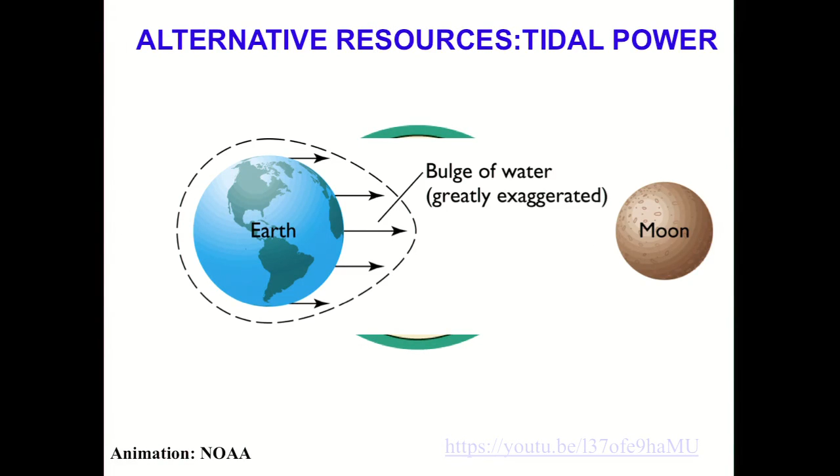So we get these so-called lunar tides, and then we also get these solar tides. I think there's a little movie here which may or may not work.

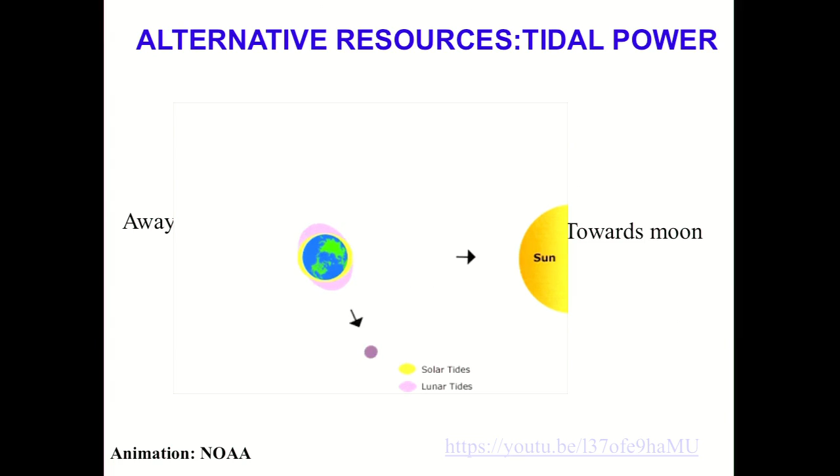You can see that we have the daily tides, which are then modulated as we go through full and new moon, which we call spring and neap tides. Those occur every two weeks, superimposed on the daily and semi-diurnal tide heights as well.

So the question is, can we actually make use of that change in gravitational energy? If you think about it, that gravitational energy change is pretty much inexhaustible as far as human beings are concerned.

When we say inexhaustible, that's not quite correct. Does anybody know what happens to the energy, this gravitational potential energy change, over time, as a result of the bulge imposed on the Earth?

Well, obviously energy is going to be lost through that process. 620 million years ago, the rotational period of the Earth was 21.9 hours. Today it's 24 hours. Energy has gradually been lost through an increase in the rotational period of the Earth because it's losing rotational energy. But we're not too worried about that on those sorts of timescales here.

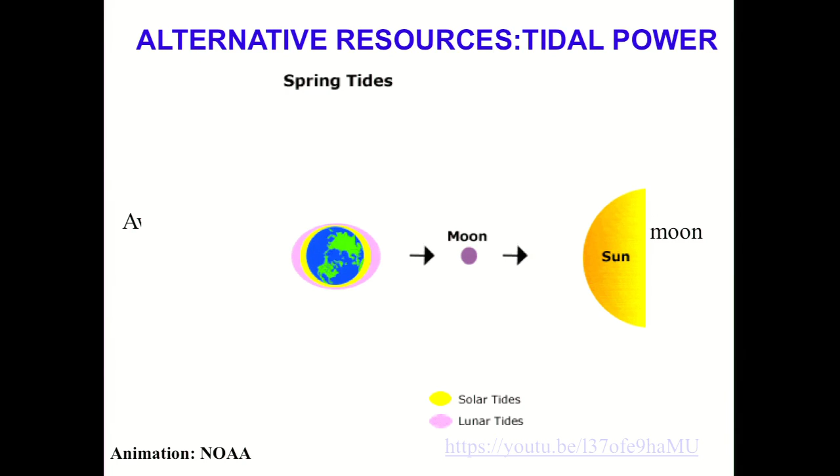As far as we're concerned, that potential energy source is inexhaustible. The question is, is it big, and can we make use of it?

So, how do we extract energy from tidal changes? Well, there are three approaches. There's one called tidal barrages, which are very similar to dams.

Effectively, as the tide height changes, water flows through a hole in some kind of dam that we might build, and that turns an electrical generator. And then, when the tide goes down, the water can flow back out in the other direction, and again we can get electricity generated.

Or we could stop that flow of water back out and hold it for when we actually need it, and release it and produce power when demand requires it.

There are also what are called tidal fences. Essentially those are vertical rotors which are placed off the coast. And then we have so-called tidal turbines, which are effectively very similar to wind turbines, except they're underwater.

Now, if you think about it, because of the density of water, it's about 800 times that of air. That should produce quite a lot of force on these turbines and produce a lot of energy. But remember, the currents are generally quite small.

In fact, it turns out that tidal barrages, because of the area they can take up, are actually the most efficient way of extracting power. We'll look at that in a minute.

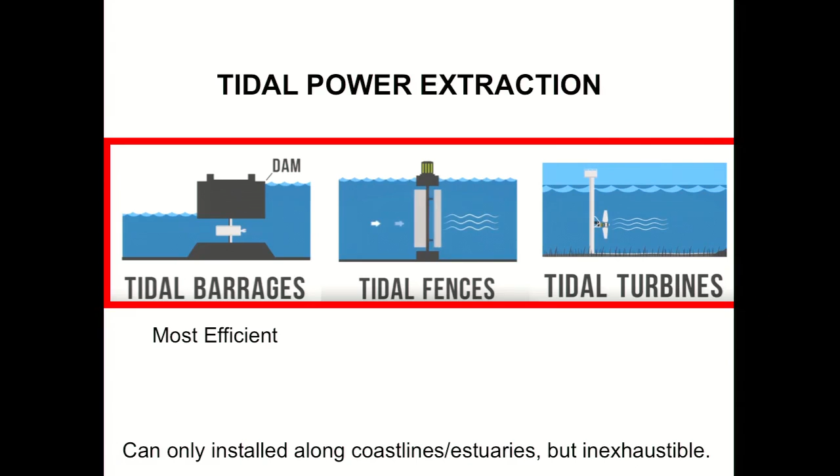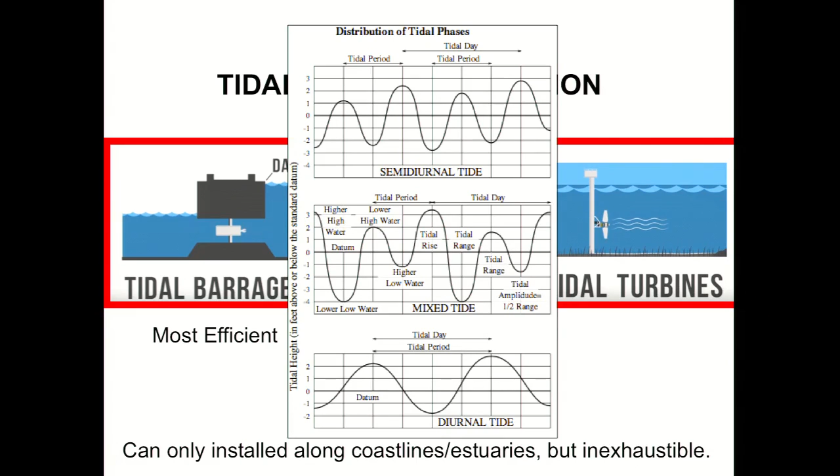So the advantage is, of course, we know an awful lot about tides, their periods, etc., and their location. So we should be able to produce a very good bottom-up estimate of the amount of power that we can extract from these tides. So it's a predictable energy source.

So, a tidal barrage. Well, what is a barrage? Basically it's a dam, but essentially it's built right across an estuary, so it's just much bigger. And what you can see there is that at low water tide and high water tide we have essentially a change in potential energy as a result of the height of the water.

And we're going to make use of that as the pool behind the dam or the barrage is filled. That's what we call the tide pool. So at low tide the water might be let out through the electricity generator to turn the water's potential energy into electricity. And the potential energy is simply G times H.

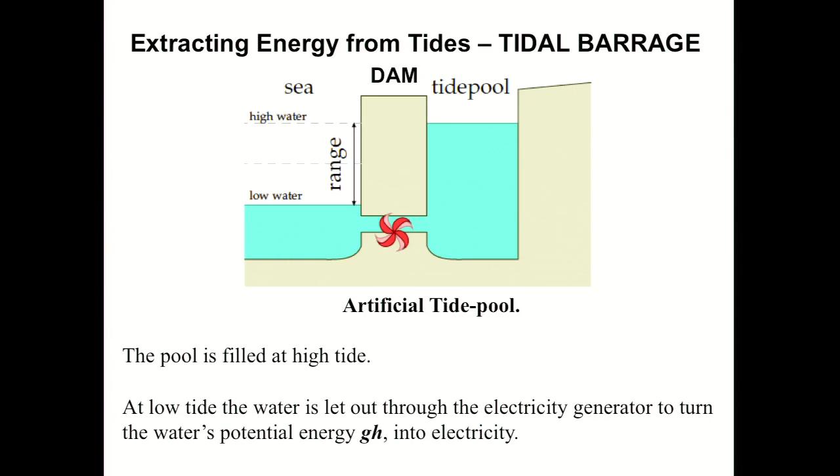Now be careful, H is not the difference in the tide change, which we call the tide range. We'll come to that in a moment.

So, let's look at a typical European tide range. On average it might be about 4 meters. That's the difference between low and high tide.

And it's been estimated through various studies that the maximum power of one of these artificial tide pools or barrages, which is filled rapidly at high tide and then emptied as we want it to be at low tide through these various generators, so we can generate power in both directions if we want. But it turns out it's actually about 3 watts per meter squared.

That number should sound a little bit familiar. It's roughly the same as our offshore wind power density for a wind farm.

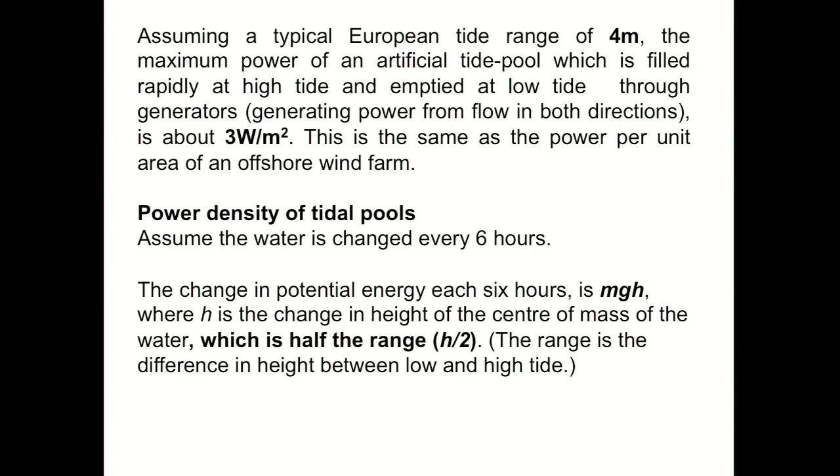Let's think about the power density of these tidal pools. Remember, in a semi-diurnal tide, water is changed every 6 hours, say. So the change in potential energy we're looking at, every 6 hours, is simply the mass of the water times G times H. But H is the change in the height of the centre of mass of the water, which is half the range of the tide, so H/2 in that previous diagram. Remember, the range is the difference in height between low and high tide, so be careful about H versus H divided by 2. Read any question about these barrages very carefully.

The mass per unit area covered by a tide pool is simply the density of the water times 2H. Remember, the density of water is roughly 1,000 kilograms per cubic meter.

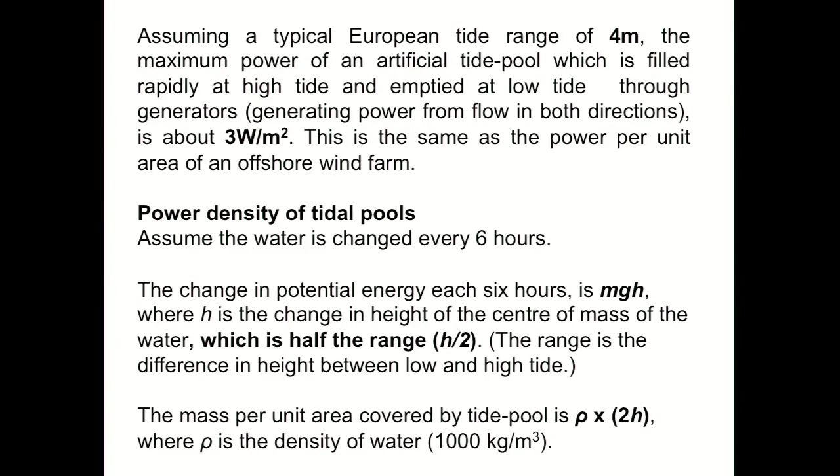So the power per unit area generated by a two-way tide pool is 2 rho H G H divided by the time over which we can access that energy, say 6 hours. Now if H is 2 meters in this specific example, then the power per unit area of our tide pool is about 3.6 watts per meter squared. That's assuming we can extract all that energy.

So the question is, what's the efficiency of our electrical generator from the previous diagram? Actually these generators are very efficient — 90% efficient is not unheard of. That gets us down to about 3 watts per meter squared, which is what we said before.

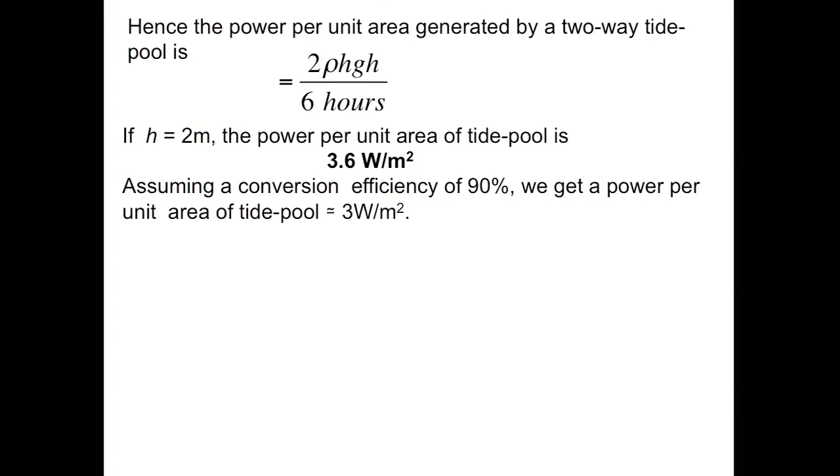Now, if we want to generate, say, 1 gigawatt of power on average over that diurnal cycle, we need a tide pool with an area of about 300 square kilometres. That's roughly a circular pool 20 kilometres in diameter.

And if you look around the UK, we can see various estuaries with typical areas of around 550 square kilometres — for example the Severn Estuary, or the Wash in northeast England off the coast of East Anglia, which is about 400 square kilometres. So those areas do exist.

Still working today. Is that a big number as far as global energy resources are concerned? If we go back to our energy budget for the Earth, we've seen that S infinity, the maximum we can get, is around 0.1 Q per year from tidal power. So it's not really a big player on the global scale, but it could be important for relatively small communities or towns, or locations suitable for installation of these tidal barrages.

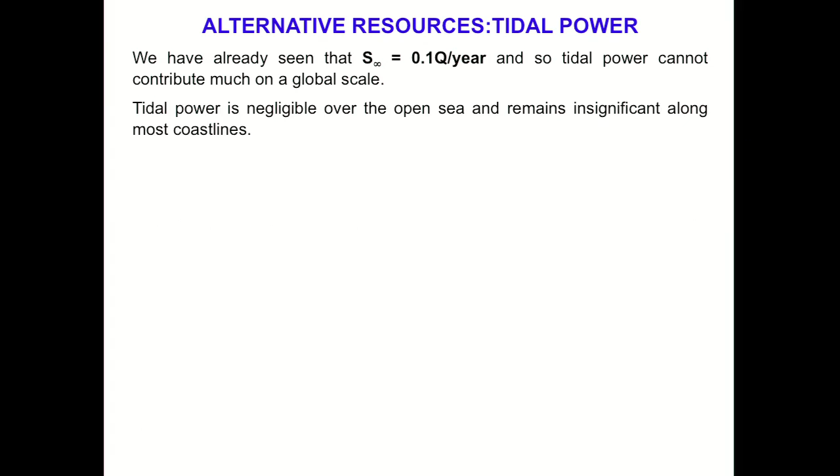Also remember that tidal power is negligible over the open sea, and actually pretty insignificant along most coastlines, but as we said, it can be quite important, particularly with a very suitable estuary where the tidal flow velocity can be substantial and even amplified depending on the shape of the estuary.

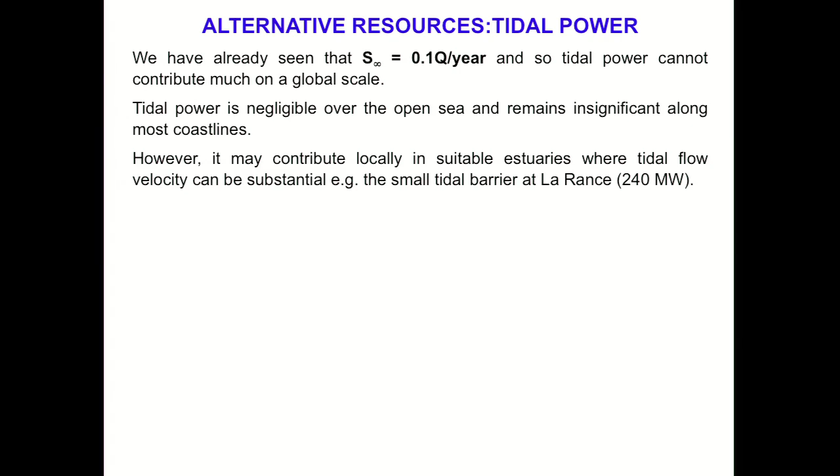For example, the La Rance tidal barrier can generate about 240 megawatts, which is actually relatively small, but it was one of the biggest for several decades, since the 1960s.

Now, if we do a survey, it turns out that the best cases for tidal power are the Bay of Fundy and the Bristol Channel / Severn Estuary. That's not just because it's a very big estuary, but because the shape of the coast funnels all those strong incoming tides into narrower and narrower regions, creating a resonance close to the tidal frequency. This can lead to very high tidal amplitudes, up to 40 metres in the Bay of Fundy, and a bit less in the Severn Bore, 10 to 11 metres, say.

So that makes it possible to utilise that rising and falling tidal water by forcing it through these electric turbines. If we look at the Bristol Channel region, a design study estimated that depending upon where you built the barrage, you could get power output of the order of 1,400 megawatts to 15,000 megawatts.

This is from the report which looked at the various locations you can build such barrages. We start out here at the so-called outer barrage, where we can get 15 gigawatts. We build a barrage here, we can get 8 gigawatts. If we go up here, we can get 1 gigawatt.

As the tides are essentially funneled into a narrow estuary, the flow increases, but the area decreases, although the height can also increase. So there are pros and cons to where you build things, but typically you would go for high velocity, high tide, with a large area behind the barrage, as you can see in the outer barrage there.

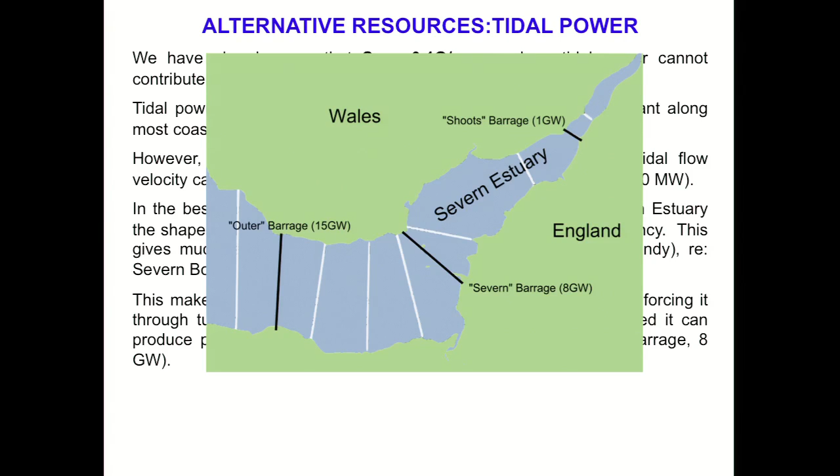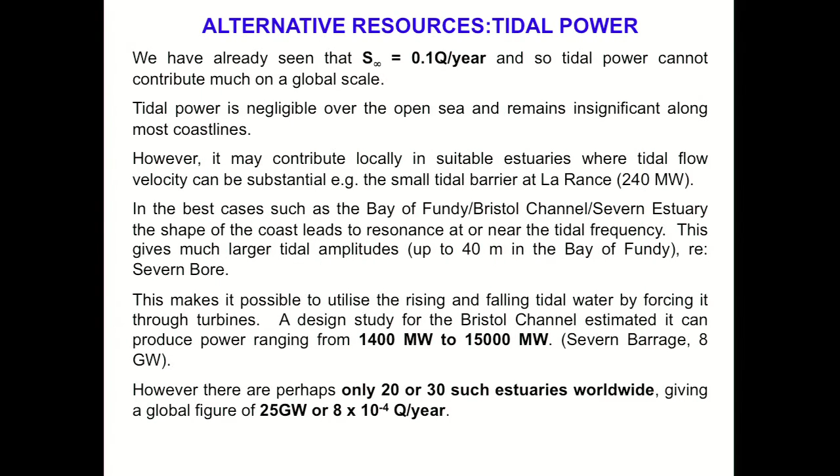However, there aren't very many places around the world like that. Surveys show that there are maybe 20 to 30 of these sorts of estuaries worldwide. So if you sum up all the potential power we can get from those estuaries, we're looking at a global figure of about 25 gigawatts. That's only 8 times 10 to the minus 4 Q per year.

Not only that, building these big barrages comes with a lot of environmental problems. Particularly in the UK, proposers of such schemes have failed to convince governments and the public that they've actually addressed those problems readily.

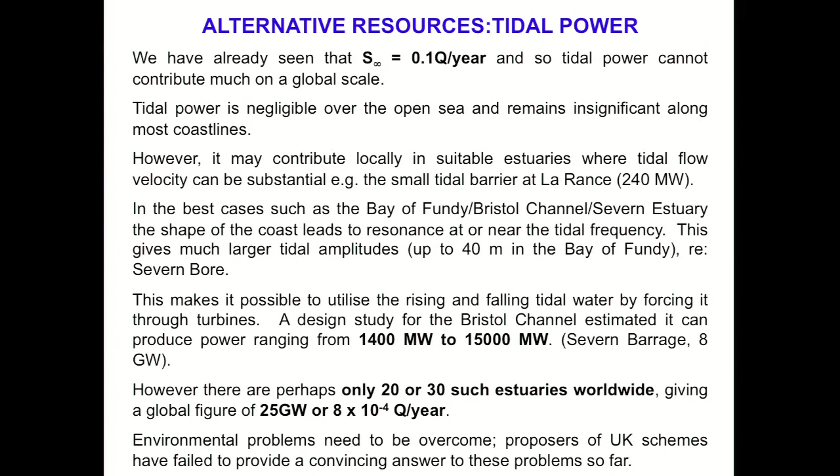So La Rance actually remained the biggest barrage in the world until 2011, when Sihwa Lake in South Korea was built. They have 30 square kilometres and were able to produce 254 megawatts. So that then became the biggest.

But if we focus just on the UK, the number of schemes that were proposed included 8 of those big large ones, but there are also about 34 very small ones, because the UK is basically an island. We've got lots of these little estuaries.

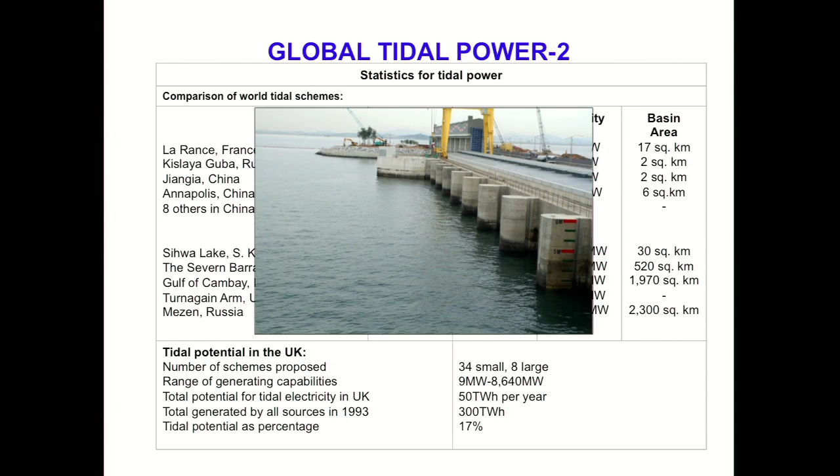Oh sorry, that's just a picture of the barrage in Sihwa Lake in South Korea. You can see essentially it's basically a barrier across the estuary, with lots of turbines built below.

Okay, what's next on the list? Well, we have geothermal energy.

Now, we estimated the total heat flowing out from the centre of the Earth to the surface was around about 1 Q per year. But if we were to average that over the entire surface of the Earth, that comes out to only 60 milliwatts per metre squared. So that's extremely small and not really viable as a global energy source.

But again, it might be useful for local communities. And there are actually two possible ways of extracting such energy. We can look for hotspots, in other words, the heat flow coming out of a very narrow region might be extremely large, and that's usually associated with volcanic areas. In fact, we've actually utilized such hotspots, or at least they have been utilized, for over 100 years in certain regions.

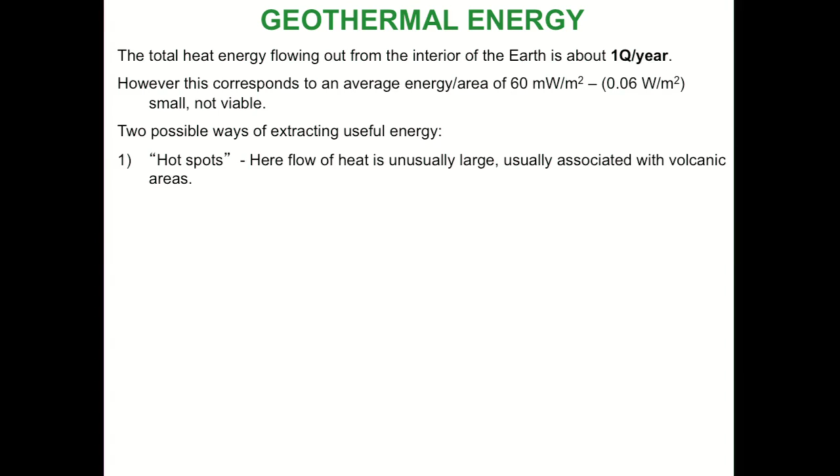So as we said, some of those have already been exploited. The world's first geothermal power station was actually at Larderello in Italy, built in 1904. And it now yields 400 megawatts of electrical power.

If we look globally, the total installed capacity is around about 4 gigawatts, mainly in California, Iceland and New Zealand. But that's about 10 to the minus 4 Q per year. Surveys suggest that maybe we could increase that by a factor of 10, to about 10 to the minus 3 Q per year.

Another approach is the so-called hot dry rock approach. You might have heard about this, or at least a related process. What you do is take water and pump it down a borehole drilled several kilometers into the rock strata, then suck that water back up another borehole parallel to it. The temperature change from going down several kilometers should heat the water up to about 200 to 300 degrees centigrade, and by the time it gets up it's superheated water and steam, which you can use to drive an electrical turbine.

Unfortunately, the experiments that were conducted did not produce very good results. Turned out the rock strata they were drilling in was very porous, so the water temperature fell much quicker and much more greatly than expected by the time it got back to the surface, and it didn't work terribly well. They put too much energy in to actually get any useful energy out. So there are no current experiments planned, and no projected resource estimate for that particular energy resource, unfortunately.

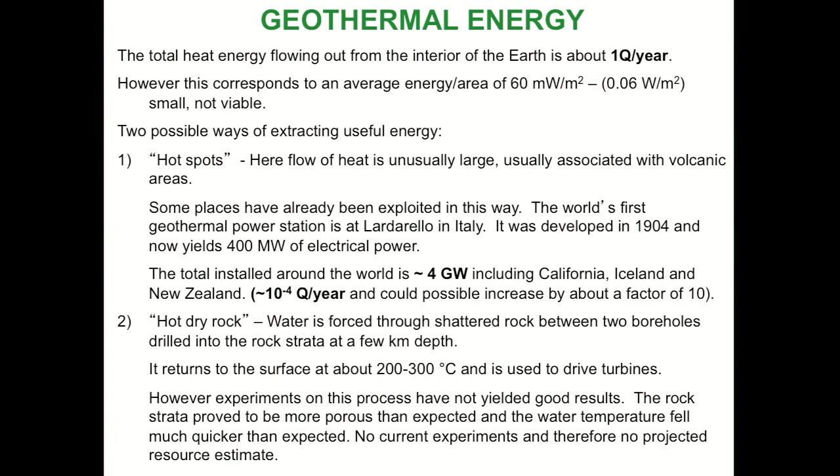However, there are some countries that do make use of it. Here, for example, is the Reykjanes power station in Iceland. Iceland actually makes a lot of use of these hotspots - they have 5 geothermal energy plants, which generate just over a quarter of their electricity needs and provide heating and hot water to 87% of all the buildings in Iceland. The remaining energy they get from hydropower, less than 0.1% from fossil fuels. So they're doing pretty well. It's also a nice tourist attraction.

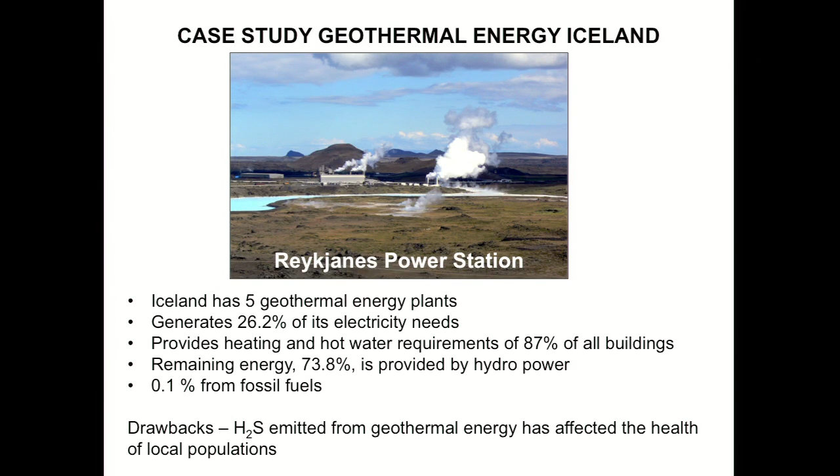However, there are some drawbacks because those hotspots are next to volcanic fissures. You also get emissions of hydrogen sulfide, which can affect and has affected the health of local populations, so it's not perfect.

Okay, so let's come to the big player in renewable energy sources: solar. It is the largest environmental source. Remember we said the net input from the sun was about 3,000 Q per year, so obviously that's got a very large potential if we can make use of it.

Let's try to make a usable top-down estimate for solar power. Start by saying the area of the world is simply A. Let's assume we can only build solar panels on land, which gives about 0.3A usable area. Of course, we have to use land for other things, particularly growing food. Also, 50% of the world's land areas turn out to be useless for either solar power or food production. So let's be really conservative and say 5% of the remaining area could be given over to solar power generation. So the usable area comes all the way down to about 0.0075A.

Now, if the maximum efficiency of conversion of solar to electrical power is 20%, 0.2 - that's a bit of an underestimate because there are now more efficient solar panels that can go up to about 0.3, but let's assume 0.2 - the total amount of incoming solar energy that is usable is then 0.0015 times 3,000, which is 4.5 Q per year. That's pretty good.

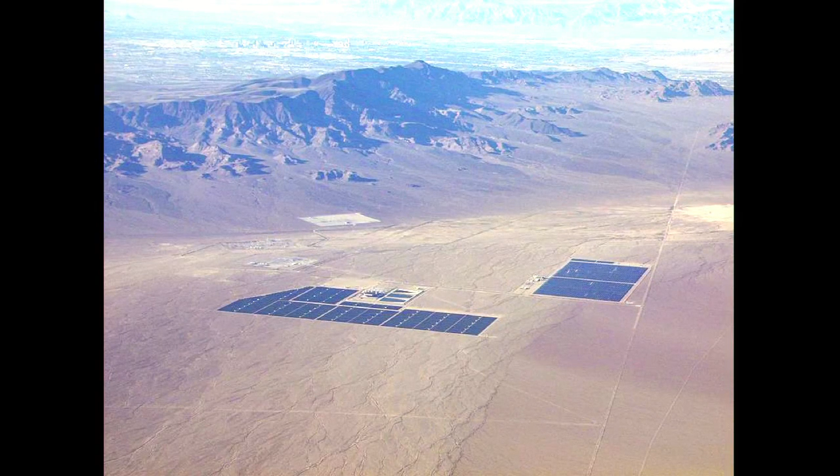And that essentially is the Ivanpah facility there. So you can see the advantage of the United States is they've got a lot of area with very little in the way of cloud cover, etc., to interfere with their solar power collection.

Okay, let's do a bottom-up estimate. Well, it wasn't possible to do that in 2012 because solar power systems were far too expensive to be built into very large arrays, but since then the costs have come down very quickly. So a lot of the engineering estimates are still in the process of being developed, but the potential power depends on a lot of factors, including weather, climate, seasons. And a lot of those are not accounted for in our previous top-down estimate, so it's got to be an unrealistic upper estimate. So at the moment what we need to do is look at, say, maybe half a Q per year as being attainable, realistically.

So in 2000, the installed capacity was 700 megawatts. Half of that was in California. But new technologies have been tried elsewhere, including Australia and China, using new approaches, and that's actually increasing the potential yield significantly. We're still waiting for the latest survey as to how good those are. But it must be stressed that once we depend on a resource such as solar power for a substantial fraction of energy, then we have to think about some form of storage, because the sun doesn't shine at night.

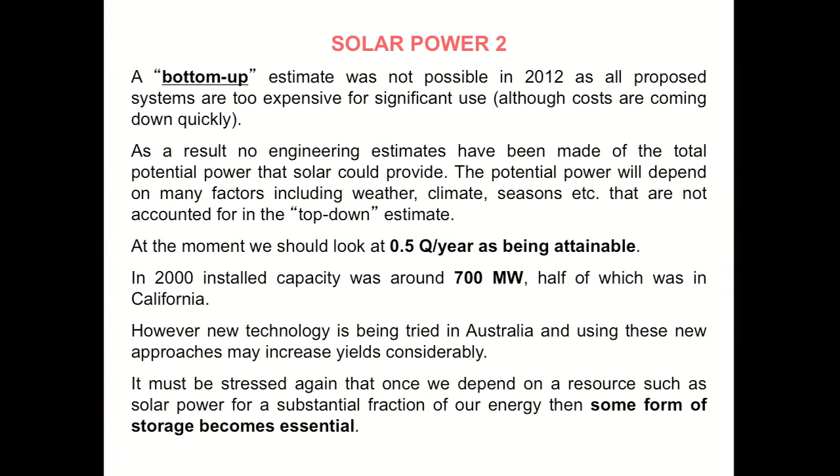So, if we wanted to do a global calculation of the available energy in kilowatt hours, that's the equation at the top there. We need the area of our total solar panel farm in meters squared. We need the solar panel yield in percent. We need to think about the annual average irradiation on our tilted panels, which we assume are pointing perpendicular to the sun.

We also have to think about how much shading there might be at a particular location, and we need to think about the performance ratio - in other words, what are the losses? And they can be quite significant. They can range between 0.9 and 0.5. Most people assume a value of about 0.75. So there are all these various losses to think about.

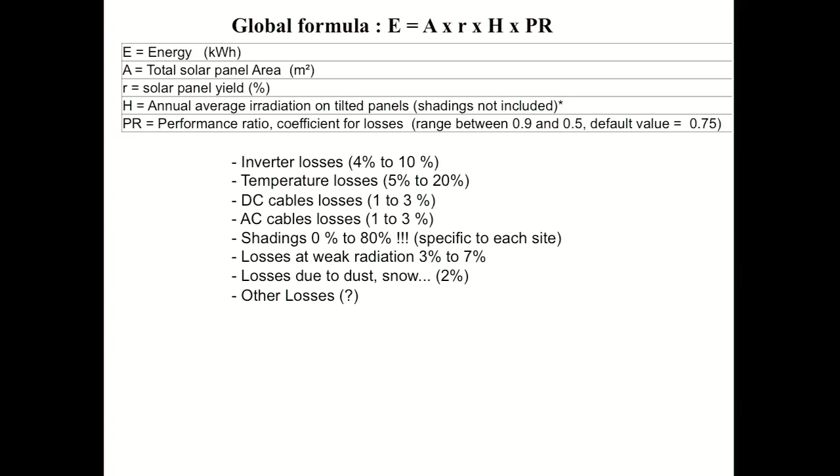Temperature losses - these solar panels tend to not be as efficient when the temperature goes up, because they don't work quite as well. That can range from 5 to 20%. Then there are cable losses, the shading we mentioned, losses at very weak radiation intensities. We have to keep them clean - if you cover them with dust or even snow, that's going to increase the losses depending on how often you clean them. And there are also various other losses we haven't even considered here.

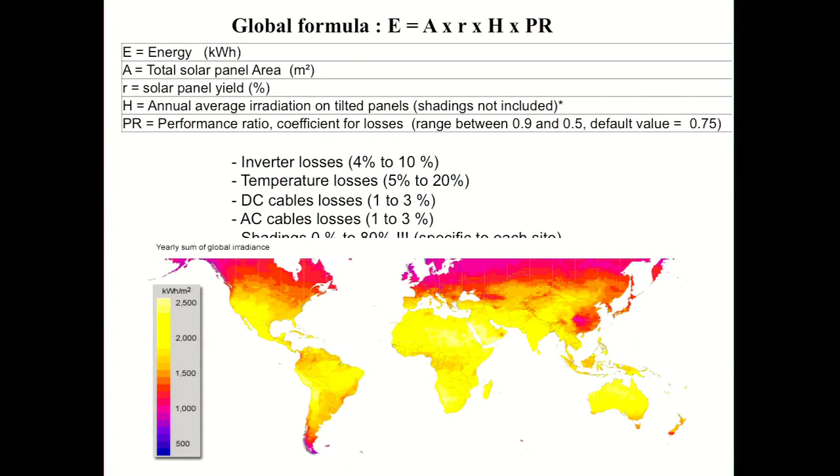Okay, this is an interesting one. This is a different way of extracting solar energy. What we've been talking about previously are what are called PV solar farms, or photovoltaic solar farms - so we're using these photovoltaic solar panels. But there is another way you can extract energy from the sun, that's called solar thermal energy.

And essentially what you do is you have a whole bunch of tracking mirrors, which may cover several square kilometers. They're sometimes called heliostats, and they focus and concentrate the sun's light onto a so-called power tower. That power tower, or receiver, onto which all the solar energy is focused, contains a molten salt, and that's heated by that solar energy up to about 500 or so degrees centigrade. That molten salt then flows into a thermal storage tank where it's stored, maintaining 98% thermal efficiency, and then it's eventually pumped through a steam generator.

And that steam drives a standard turbine electrical generator - that's known as a Rankine cycle, I'm sure our physicist friends know about that. It's similar to a very standard coal-fired power plant, except it's fueled by this clean and free solar energy. Now, the advantage of this design is it can operate at higher temperature, obviously. Thermal energy at higher temperatures can be converted to electricity much more efficiently, and you can actually store it a little bit longer for use later, even after the sun's gone down.

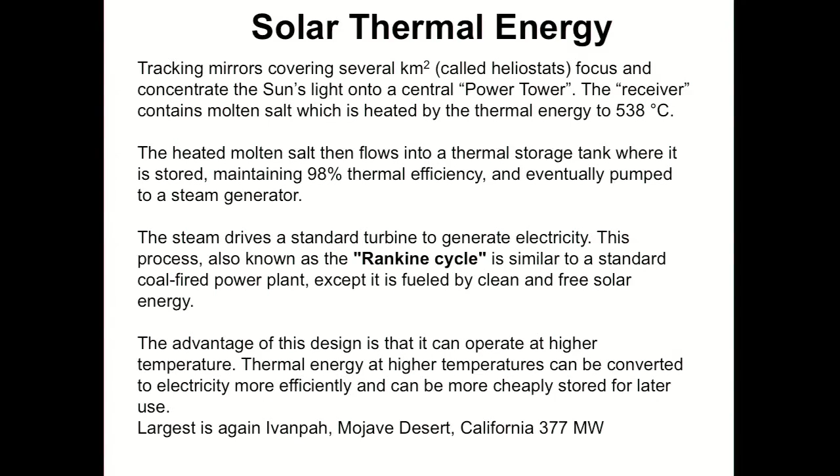And again, one of the largest was built at Ivanpah in the Mojave Desert, California, and was able to generate about 377 megawatts. So that's what they look like - this is in the Mojave Desert. You can see the central tower there, and these are essentially metallic mirrors focusing all the radiation onto those towers. So the fluid is stored at the top of those towers there.

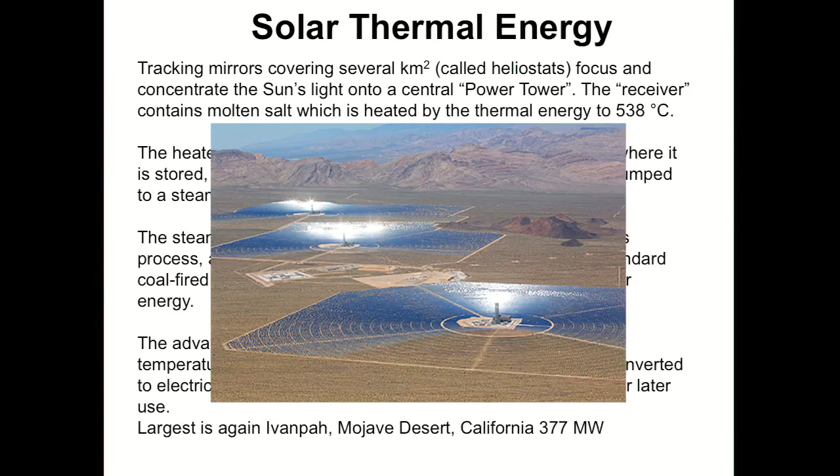Why build those instead of solar panels? Well, it was initially thought it would be a bit cheaper. However, there have been lots of arguments in the press recently and in industry suggesting that they're not as efficient as people think they are. So again, the jury's out with respect to how much they might contribute to solar power conversion in future.

Okay, let's move on to biomass or biofuel, which was also on our list. We can, for example, grow crops, so we're basically utilizing a process of photosynthesis to convert solar energy to a fuel mass. Our top-down estimate for photosynthesis was 1.3 Q a year for the entire biosphere of the planet. However, of course, we have to use 40% of that for food. And as food's the priority, we should not really expect to use more than maybe 10% of the total productivity from photosynthesis for fuel use. So we're looking at around about 0.13 Q per year. Not insignificant.

Remember, the year-round solar flux is 150 watts per meter squared at the surface, or 150 megawatts per square kilometre. Fast-growing plants fix about 1% of it into plant mass. If we were to convert that fuel with an efficiency of 25%, then we get an output of 0.4 watts per meter squared. It's not great, but it's almost free, though we have to take into account extracting that fuel from the plant material.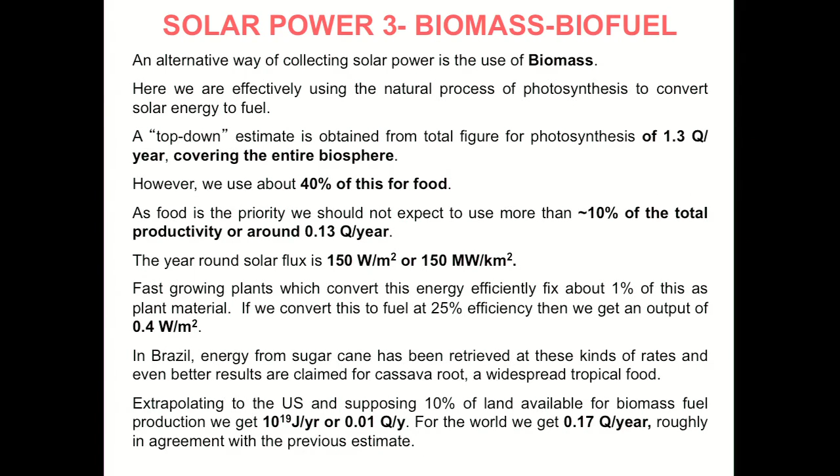What about other sources? Well, let's look at alternative sources in the UK and see what we've got available. Let's do a budget. Wind, we talked about a lot. We're looking at 230 terawatt hours per year. That's what we call our S2 value. Waves, maybe, if we were to build those wave generators, which we're not now because the company went bust, 60 terawatt hours per year. Tidal, of which the Severn Bore, if it ever gets built, would give 13 out of a total of 45 terawatt hours per year. Hydropower sites that are not yet developed, 2 terawatt hours per year. And recycling and burning of waste material, treatment to yield oil gas for direct incineration, 150.

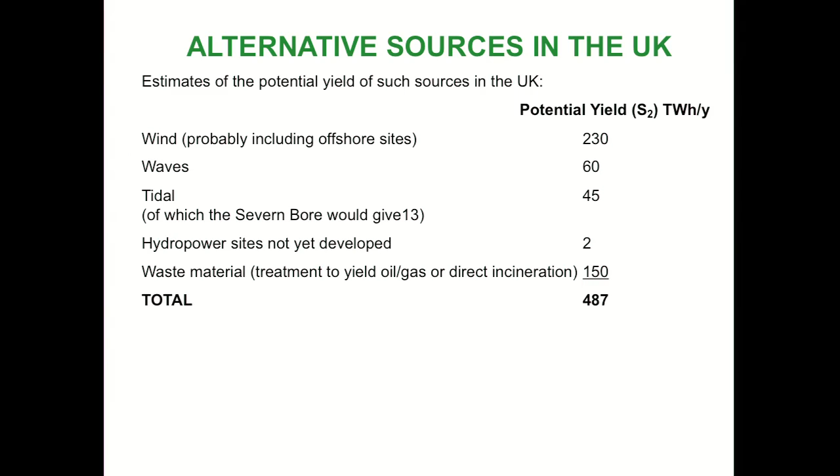So we're looking at a total of 487 terawatt hours per year. For comparison, a continuously running 1 gigawatt power station, gas or coal, typically delivers around 9 terawatt hours per year. And the total power generated in the UK in 1975 was 210 terawatt hours per year. So we're well placed for several of those sources, but not so much for solar power or indeed hydropower. We're not really looking at more than 25 to maybe 40% of our total power from similar alternative sources.

Okay, let's continue. The potential yield from environmental sources does exceed electrical power generation in 1975 by about a factor of 2. If we were to exploit all of those, we would manage to replace all fossil fuel used in electricity generation, 900 terawatt hours per year. We could provide an additional 277 terawatt hours per year to be converted to electrical power. If that additional energy was then used to replace fossil fuel-based heating at 75% efficiency, then we could reduce our fossil fuel burden by a further 370 terawatt hours per year. So all these calculations can be made using these basic assumptions. We could potentially reduce the fossil fuel demand by maybe 1,270 terawatt hours per year.

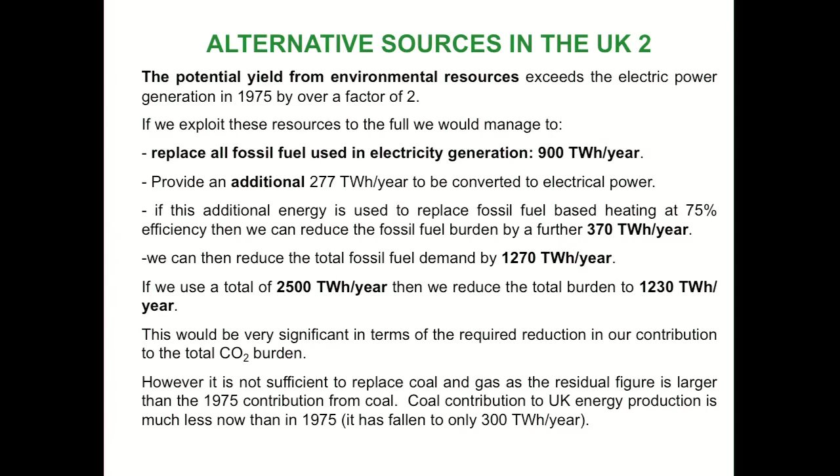It's fallen to actually less than 300 terawatt hours per year. So this is basically a summary of the alternative resources we've discussed. On the far left, we're looking at the power units in Q per year from all of those sources: hydro, wind, waves, tides, geothermal, solar, and biomass.

We have some power densities that we've estimated, but sometimes they're not always available, so we're assuming they're going to be extremely small. S1 is what we call the present installed capacity. S2 is the estimated maximum potential capacity. And S infinity was from our previous figure, which showed the natural energy flow in the Earth climate system.

You can see that hydropower is actually currently very small, 0.01, maximum about 0.1 out of a potential maximum of 1.3. Wind, on average, is small, estimated potential 0.2 out of a maximum of 12 from our energy budget, top down.

Waves, well, effectively I think we can ignore those - very, very small installed capacity, and maximum potential is negligible. Tides, again, globally are small, so we're looking at maybe 10 to the minus 3 as the maximum potential out of 0.1 for our budget.

Geothermal, again, very small, 10 to the minus 4 to 10 to the minus 3 maybe, between the present and the estimated maximum potential, out of a maximum energy flow of about 1.

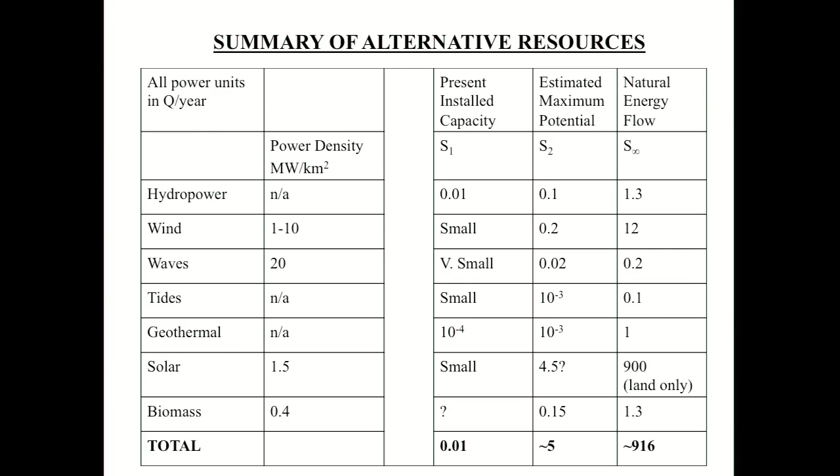We mentioned that if you start to look at solar in anger, we're going to have to think seriously about storage in order to match demand with the available energy. So this is how effectively our thinking has to change.

In the past we simply had power generation, plants, consumers, houses, factories, but now we have to think very carefully about storing that energy in order to provide supply when demand is needed, because of the intermittency of our renewable resource, mainly wind and solar.

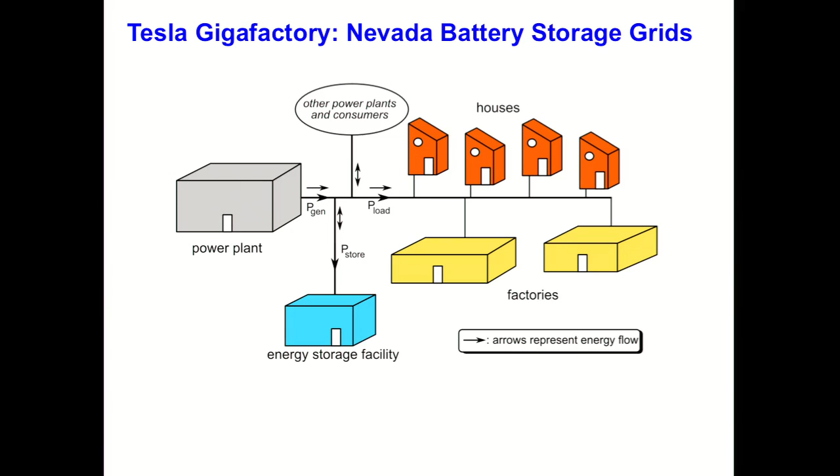This is actually a 35 gigawatt hour production facility supporting production of electric vehicles. We'll come to all electric economies next week.

And of course you may have heard in the news that Tesla have also provided a 100 megawatt grid of batteries to provide extra capacity for demand in Australia. That's it there - effectively that is now providing backup to wind power farms to make sure there are no intermittent dropouts in power for that part of Australia.

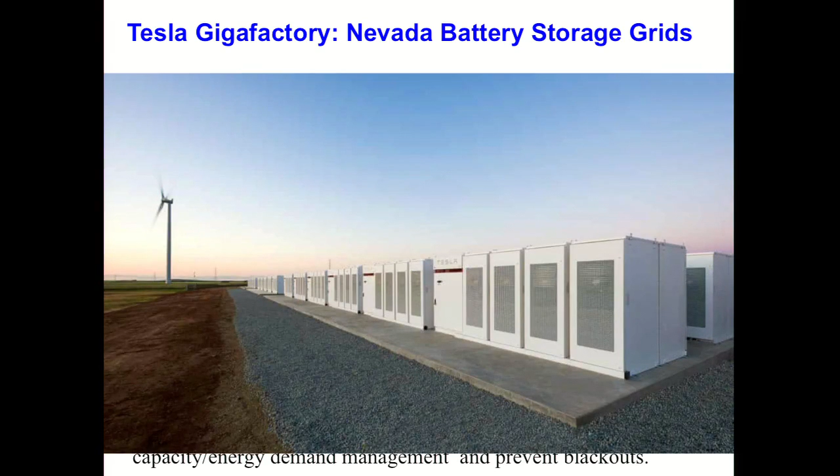So it is possible. I think we've got through most of the energy flows, the alternative resources that are available. We'll summarize this again next week, but what you can see is that we've got a lot of work to do to extract usable energy to the levels that are going to be required based on our estimate of 3 to 5 Q for the end of the century.

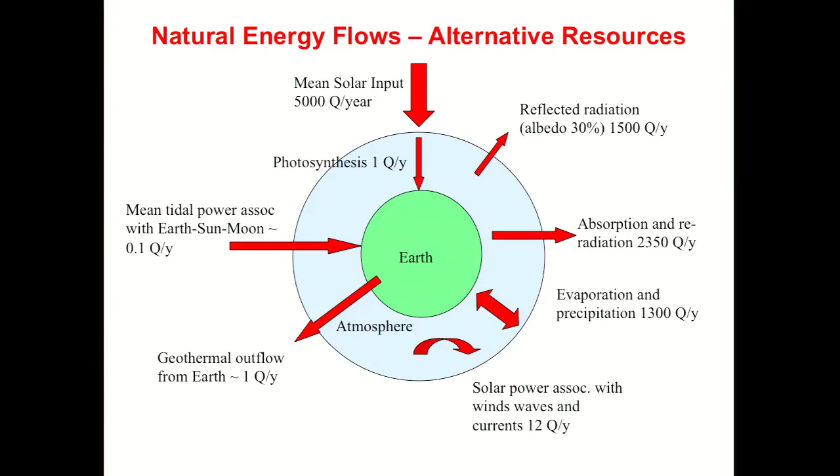So we'll make a brief start, and we're going to talk about definitions of resource and reserve, because we need to think about the timescales involved with respect to how long have we got to sort out those renewable energy replacements based on our current consumption rates, and in particular how long have we got before our non-renewable energy sources run out.

Up to now we've made some projections about the amount of energy we can use before excessive global heating prohibits increases in consumption. Currently that's been argued about. 1.5 degrees C is the current maximum we're looking at, but it could be as high as 2 or 3, depending upon which scenario you look at.

We then made some projections about the amount of energy we're likely to use when the world population stabilizes by the end of the century, 3 to 5 Q per year. We saw that that was a large increase in energy use globally, and we questioned whether or not we have the resources to actually fulfill those requirements based on current energy resources.

Now, to answer that question, we have to think very carefully about A, the amount of energy available at the moment, and how long some of those components of that energy resources can last.

Now, normally energy is split into 3 equally sized sectors: household and commercial, industrial, and transport.

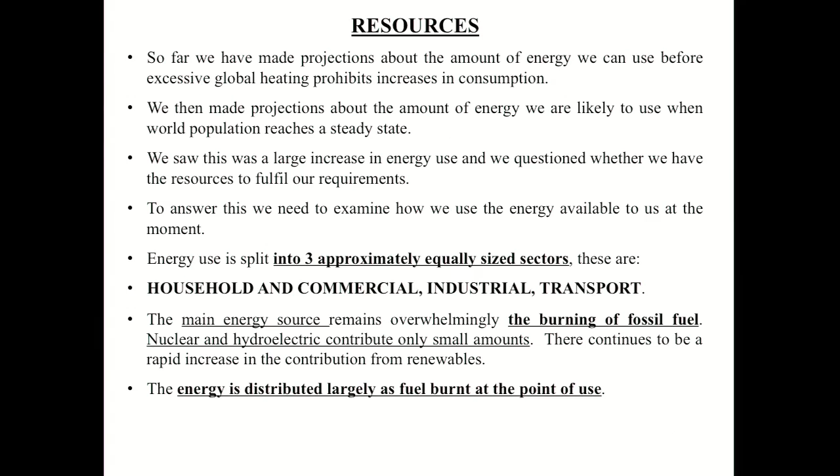The other thing we have to remember is that that energy is distributed largely based on what we call fuel burnt at the point of use. Only about 10% is actually distributed as electrical power, although that, in effect, represents 34% of the total budget because of the relative inefficiency of converting fossil fuel to electrical power. A typical power generating station burning gas or coal at its maximum efficiency can only do about 30 to 34% conversion of the available energy in the coal mass or oil mass into electrical power.

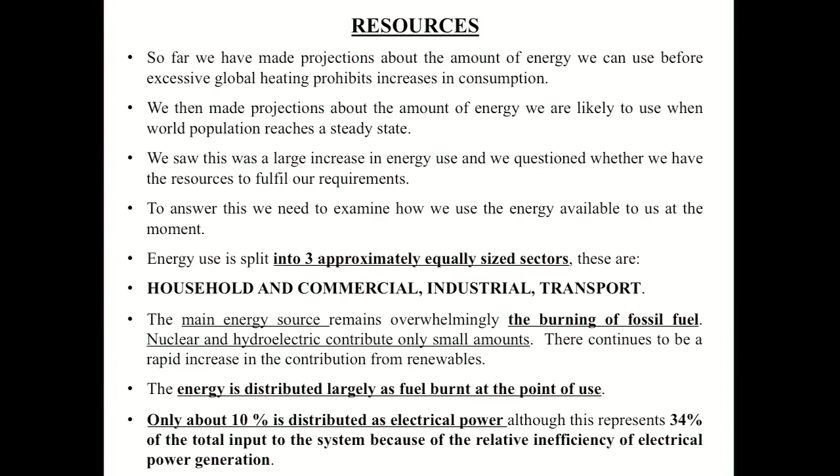The question is, can that increase be maintained, and are we ever going to be able to replace gas, coal and oil completely? Well, let's think about that.

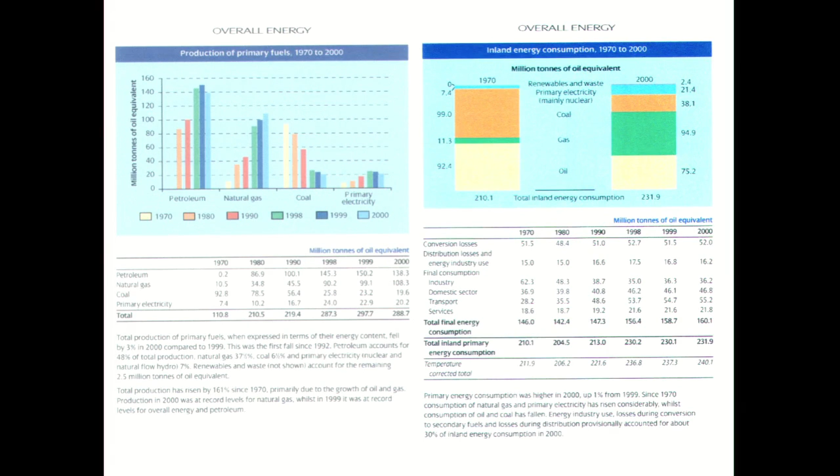We also said that we have to think about the time scales. Now, let's think a little bit about oil resources, because that's a good example about how to calculate how long our fossil fuels are going to last. Historically, oil companies have mounted this continuous effort of exploration to maintain oil reserves, because they've got to sell it. That reserve is typically equivalent to 10 and 20 years of current production.

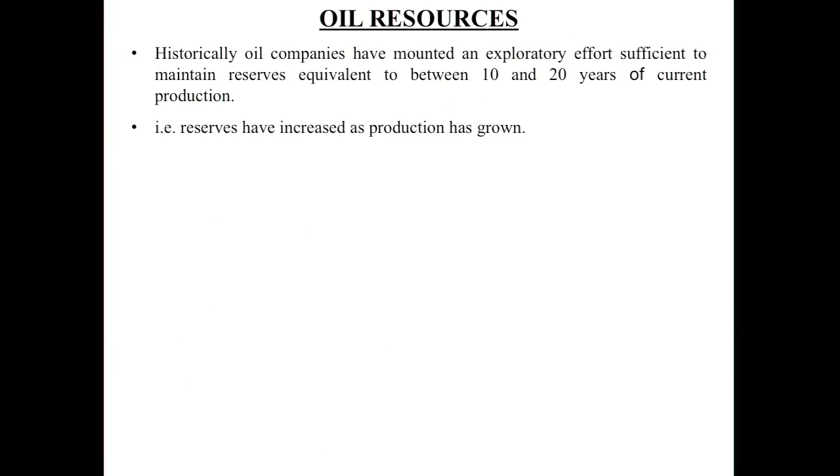It also means that the reserves of that oil have increased as production has grown. We tend to discover more and more. However, what we discover tends to be smaller and smaller oil fields, because we tend to discover the big fields first.

What we have to do is measure what we call the resource limit for oil. So we're going to look at an analysis by two scientists, Campbell and Laherrere, which was published in Scientific American way back in 1998, but the methodology is still used today. They said we have to think about three numbers in order to be able to project future oil production and how long it's going to last.

First of all, we need to know the number that tells us the total of how much oil has been extracted to date. Second, we have to have an estimate of the reserves, in other words, the amount of oil that companies are able to pump out of their existing discovered oil fields. And then the final number, which is a bit more vague, is a guess at the quantity of what's called conventional oil remaining to be discovered and exploited.

So the question is, how do we get those three numbers, and what kind of equation have we got to put them into in order to estimate when our oil is going to run out? Together, they should all add up to what we call the finite quantity of the resource, which we're going to call little r lim. So that's the finite resource for oil.

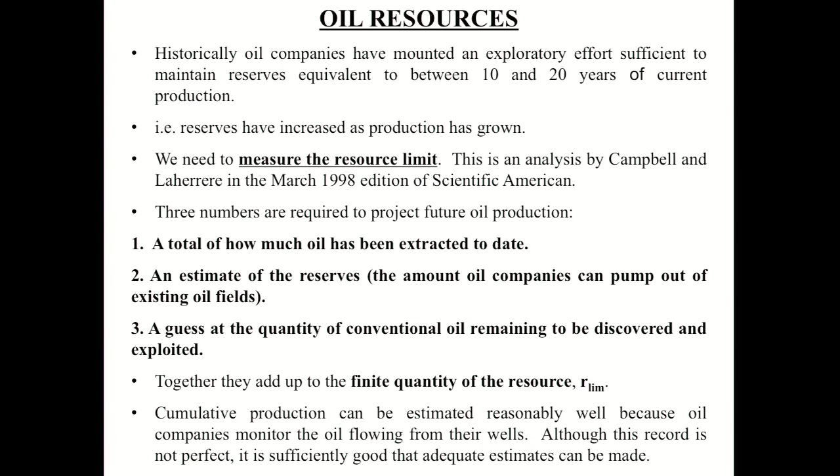What about the final one? It's very hard to find estimates of the total current reserves. There are lots of reasons for that, mainly because the figures which are provided to trade journals from oil companies and governments have a lot of problems associated with them.

First of all, estimating the size of an oil field is not an exact science. Normally a geologist will provide a range of reserve estimates and associated probabilities about the sizes, produced in a private report to the producer. In practice, companies are often vague about the confidence of their reserve estimates, and they may publicize whichever figure suits them because they want to enhance their market value and get orders.

In the case of OPEC countries, the larger the reserve, the greater the amount they can export, so there is a temptation to be rather optimistic about your estimate for reserves. A good example of that was a sudden and suspicious leap in reserves by 6 of the 11 OPEC countries in the late 1980s, which happened after various governments took over the fields from private companies.

In part, those estimates were warranted due to subsequent better updates and surveys of previous rather conservative estimates and extrapolations. But there were no new fields discovered in that period, and no major technological breakthroughs in terms of improving the efficiency of extracting the oil, and yet the estimates suddenly increased by between 42 and 197%. So there are some difficulties with using those numbers.